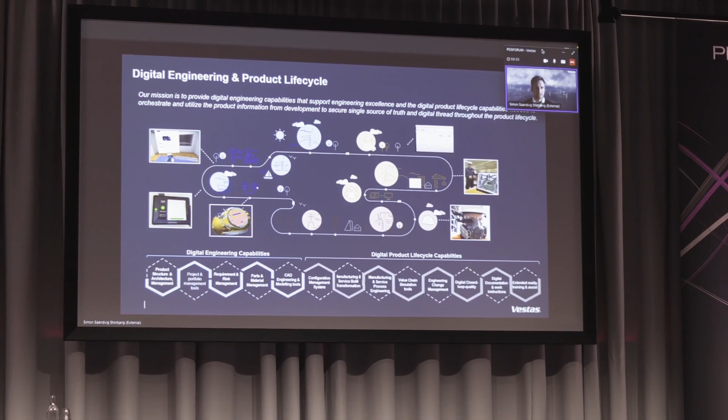So a few words about me. The topic that we're here to do today is very central to what we're working with in the area that I'm heading. We're working with what we call digital engineering, basically providing the capabilities to support engineering excellence, and the capabilities to utilize all of the data and great information that we generate in engineering downstream at Vestas. We organize into 11 digital product teams that span the way from working with product architectures, through working with bill of materials, configuration, documentation, simulation, and on you go.

So as you can imagine, lots of topics very close to the topic of today. The content, what I thought would be relevant for today, is bringing a few insights into our story. Rather than going through all of the details, I would try to spend some time actually giving you an introduction to Vestas as a general, what is the company, and also some of the context for what have motivated our digital thread journey over the past 10 years. And then in the ending, I would share some few examples of our story. I know there's much to cover, so I think we'll have a good time.

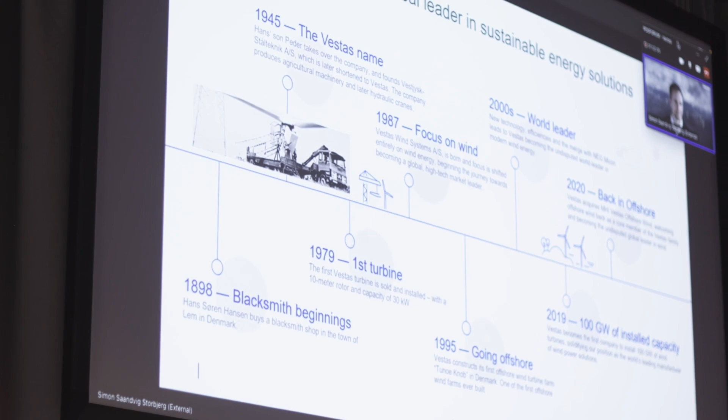But that's the numbers. If we look to the history of Vestas, we are a company with roots in Denmark back in the 1890s. The world was about to see the first turbines, and in a small blacksmith shop in the west part of Denmark, a guy got a great idea to start building turbines, and the first turbine saw the world in 1979. And the product has obviously developed a lot since then. You see a picture of one of the first turbines on the screen.

And 40 years later, 4 years ago, Vestas marked the 100 gigawatt milestone of installed capacity. So as you can imagine, quite a dramatic and impressive evolution over those years. And today, Vestas is the leading manufacturer of wind power solutions. If we look at what kind of wind turbine products we offer today, it's evolved into broad solution programs, focusing on both onshore and offshore. And Vestas is supporting wind turbines across the globe, which also require different kinds of products to capture the wind most effectively.

I'm not sure if you've had an opportunity to get close to a turbine, but at a distance, it might be hard to get an impression of the size. So I included this slide to give you some idea about what kind of amazing products we are dealing with. This turbine on the screen here is the latest variant that we have developed. It's a 15 megawatt machine. It generates power equivalent to 20,000 households.

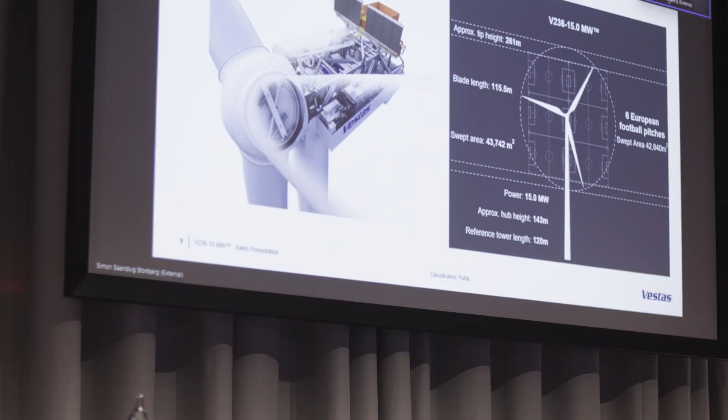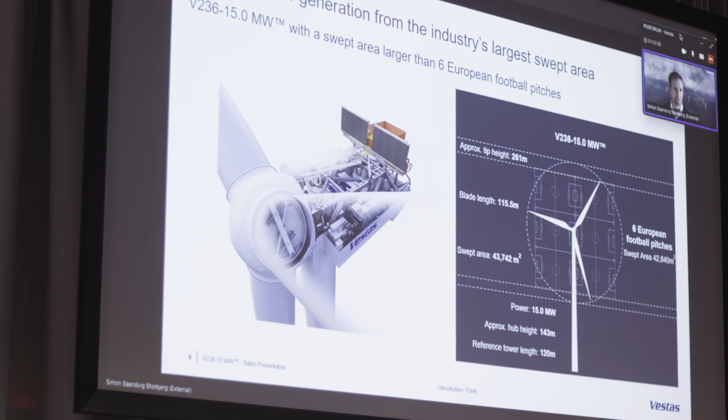And if some of you drove from Denmark to Sweden today over the Øresund bridge and looked up at the big pillars, you can imagine the height of this turbine, actually reaching 60 meters higher than the bridge. So the tip height here is 261 meters. For the latest 15 megawatt turbine, you would typically see a hub height, that's the center where the blades are installed, of 143 meters. So imagine up at that height, you have a house of 200 square meters, with a machine room of 600 tons. So I think it's quite a magnificent piece of engineering that we're working with. Of course, also requiring a lot of digital support.

So in the renewable energy sector, we have some quite unique challenges, and that has also driven our digital thread journey. So that you understand what has motivated our journey, I will give a few insights into our challenges and what motivated our digital thread journey. And it is clear that the world is facing quite immense challenges to reduce emissions. There's common agreement that if we don't act, climate change and temperature will just increase and bring devastating impacts to the world.

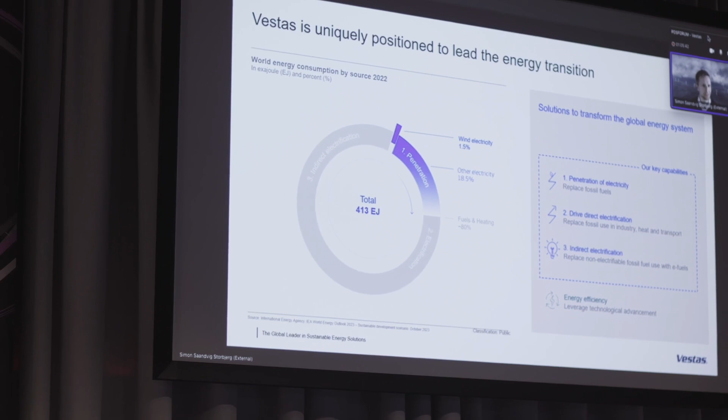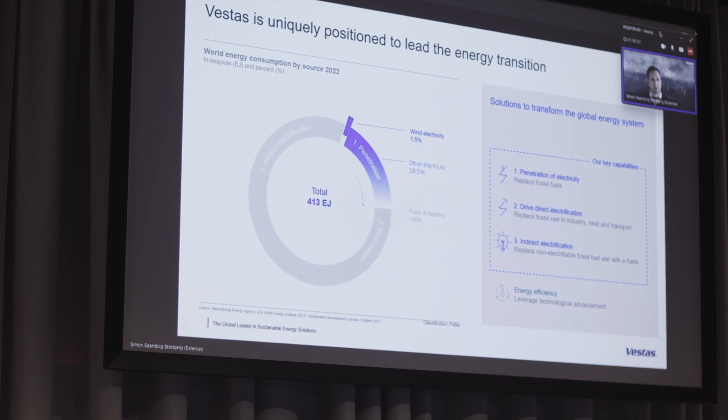So we need to decarbonize the world, and Vestas is uniquely positioned to lead that. We are offering some key capabilities to transform the energy system. And if you look at the donut on the left side of the screen, what you can see today is that wind actually only covers 1.5% of the total energy demand. So you can imagine there's quite a lot of work ahead of us to fill the full donut. And this energy transformation is driven both by securing green power, electricity, but also, as you can see, by replacing fossil fuels in industry, heating and transport with electrical.

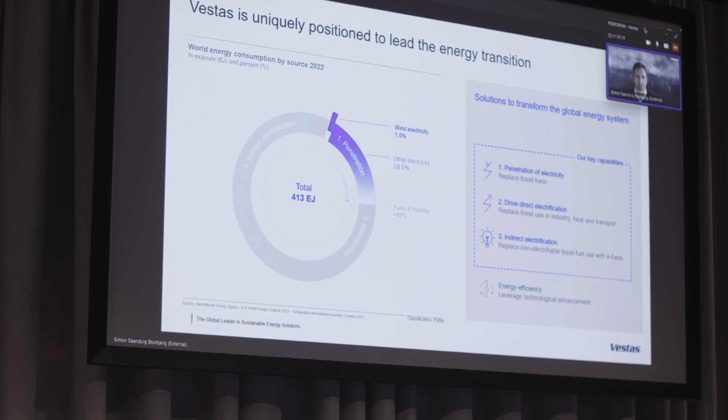And of course, also lastly, replacing these non-electrical fossil fuels with green fuels or e-fuels, as we call it. So that's the solution space we offer in, and that's where we are happy to be.

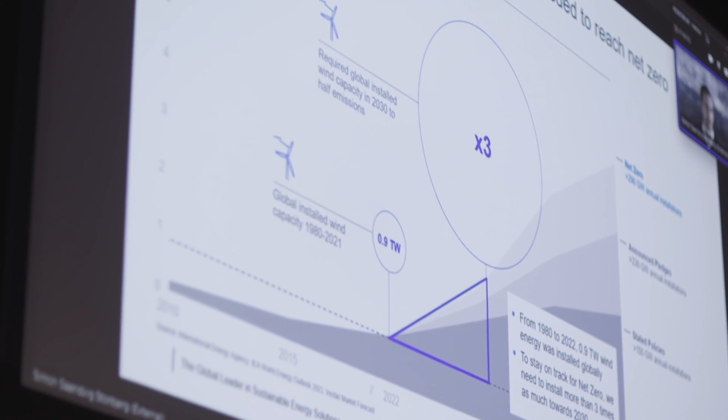If you look at it from a development over the years to come, the energy transition is set for a quite unprecedented ramp up. We are on a quite significant journey to reach net zero, basically avoiding that our temperature increases continuously drastically. We need to install a significant portion of wind capacity over the next years. Depending on what kind of forecast you apply, it looks to be that the turbine installed capacity needs to be tripled over the next period to 2030.

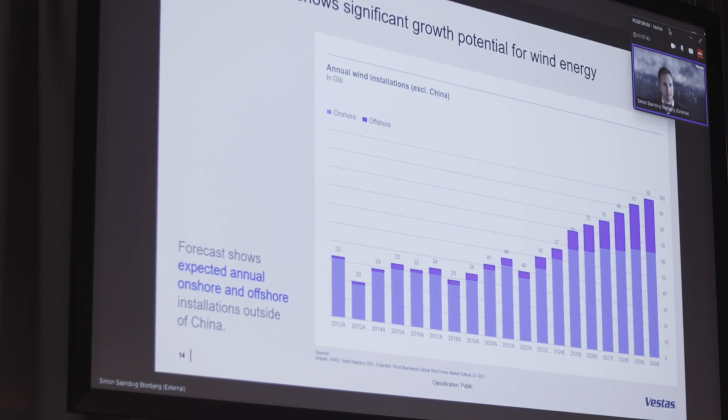And of course, often the reality doesn't turn out exactly as the politician has pledged, but regardless, the ramp up that we're looking into will be significant. And that's also evident if you look to the forecast numbers on the slide here. On this slide, you could see in the light blue the onshore forecast developing over the years to 2030, and in the darker blue the offshore forecast, which you can see start to pick up over the coming years. And all of this sets requirements for our ability to scale, which is one of the key drivers for why we would need to build digital solutions.

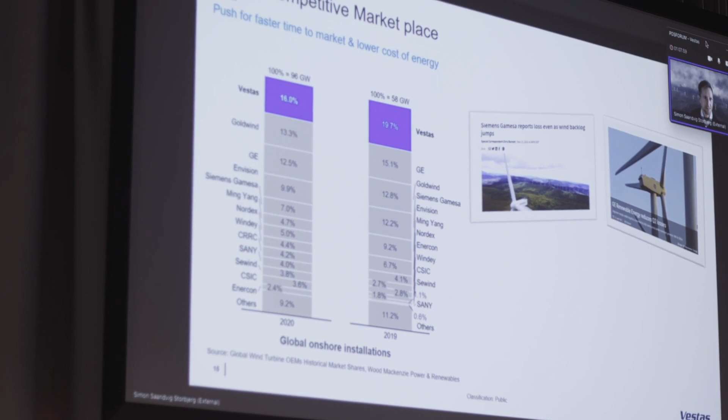Another context-setting factor is that the wind market is highly competitive. We're not the only player. There are quite a few industrial players in this scene. And as you might have heard over the last years, the margins have not been fantastic. Actually, quite a few of the major OEMs have negative results as a consequence of multiple factors, but overall, also giving a very clear signal that it is a maturing industry. We need solutions to cope with the complexity that we are dealing with, and also, of course, to enable that the business that we are in is also financially sustainable over time.

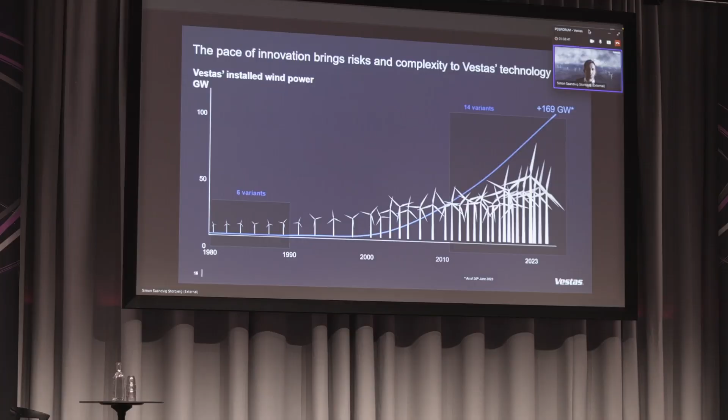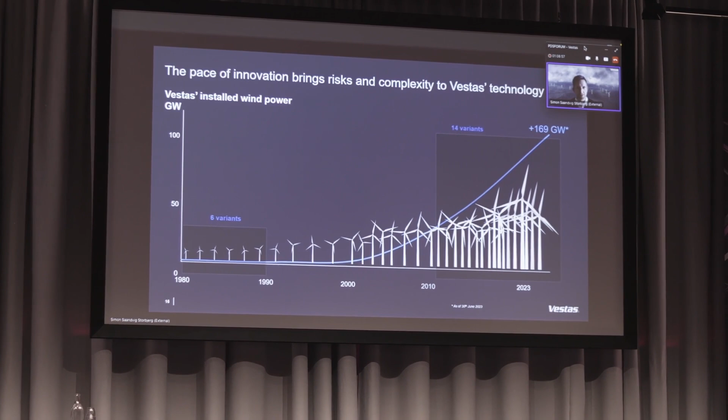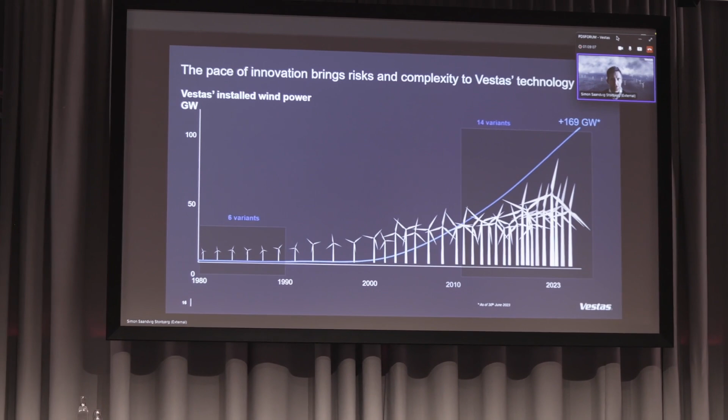And at the same time, what you see on the slide here is also a pretty stellar slide. You could see the number of variants that have been introduced from Vestas over the years, and this is as a result of the push for speed. You could see in the last 10 years, quite a few additional variants have been introduced, enabling that we can lower the cost of energy, but also to make sure that we can capture the wind in all of the markets that we are required to, or have a need to be in. And all of this has translated into progressively larger investment risk for Vestas, and of course also lots of complexity to our suppliers and customers.

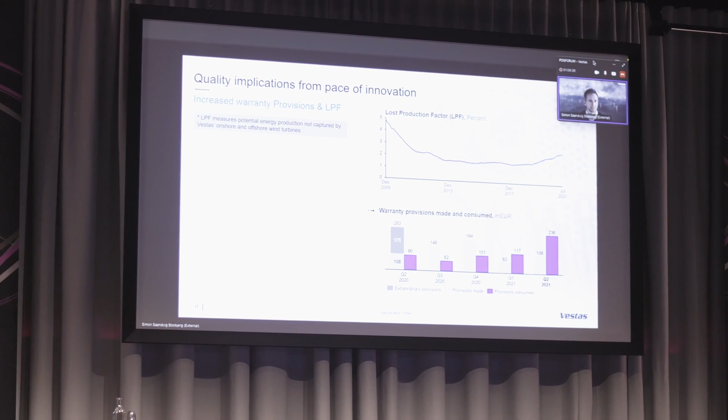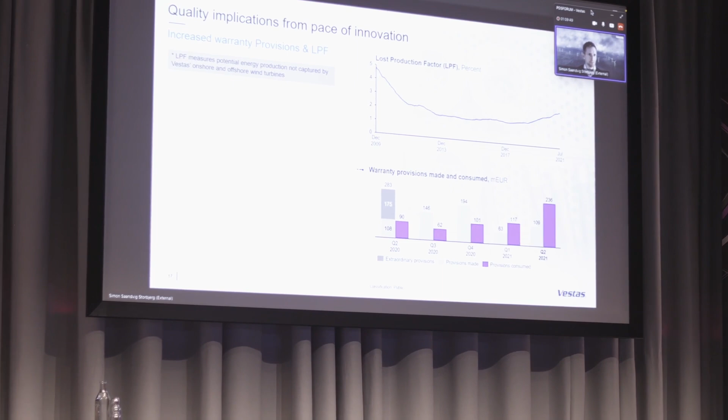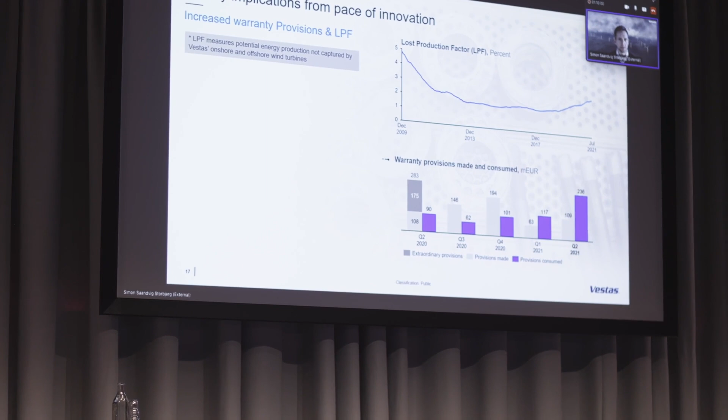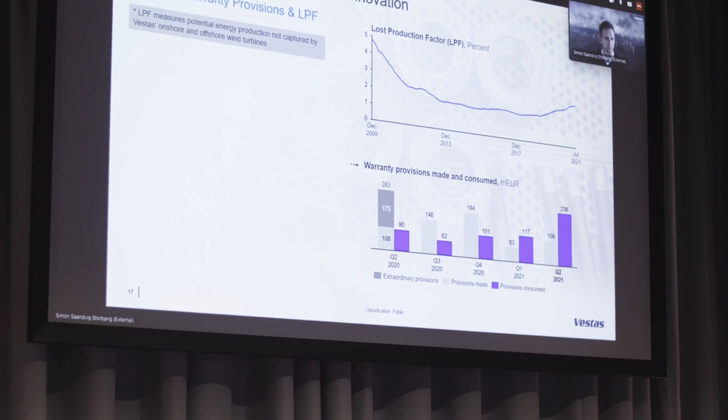And a result of this is evident if you look to the quality and our ability to keep our lost production factor, which is a key metric for Vestas. What you see in the rightmost corner is a graph which signals our lost production factor development over the last years. As you could see, we had a very good rate from the beginning of the 2010s. Over the last years, unfortunately, it's picked up the wrong direction, and as a consequence, our warranty provisions for quality have increased significantly, and the same goes for the other OEMs in the industry. So this is one of the key drivers for digital, that we are able to support engineering, support introduction with new ways of working, so we can actually reduce this situation and introduce products that yield a very high uptime.

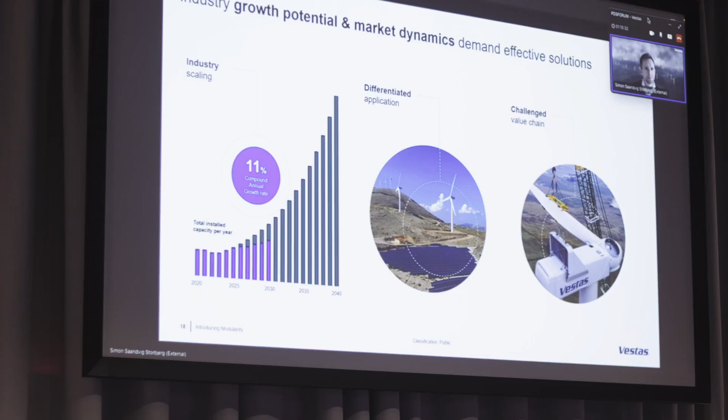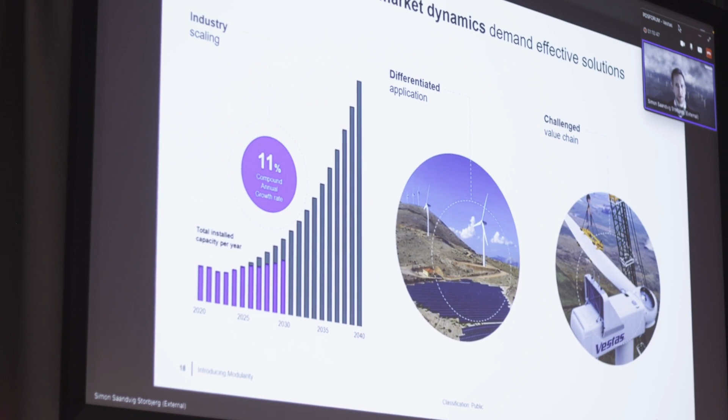So summing it up, the industry challenge that we are in is basically a mix of being able to scale efficiently, meeting the global demand. Staying a global player requires that we are able to provide differentiated applications. So the use cases and use factors for wind vary across the globe. It's due to wind conditions varying, grid requirements varying. Lots of requirements are very unique to the different markets. In other words, Vestas is basically there to customize our solutions most effectively to those needs. And that brings in a challenged value chain. So we need to operate that value chain and support that we can have operational excellence through the chain.

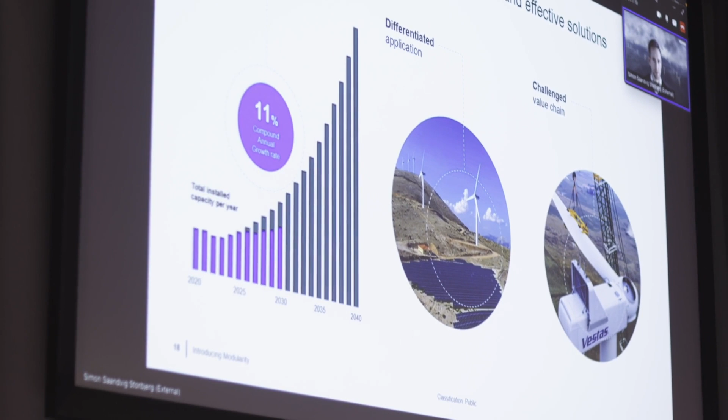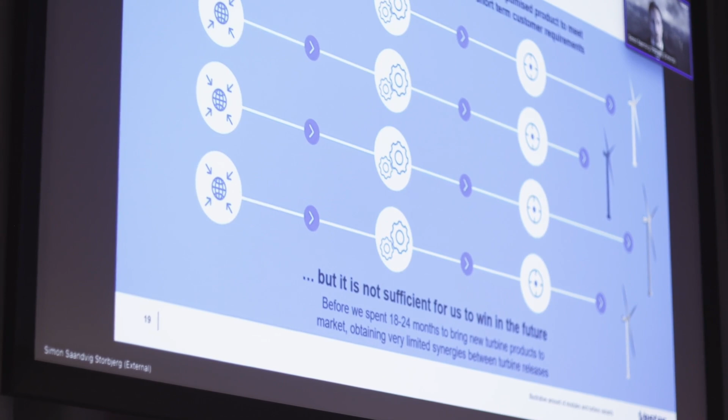And for that reason, Vestas has, over the last years, introduced a modular product strategy. We are undergoing that transformation of our product development approach. So in the former approach, you would find that our development was very driven by a set of customer needs, more one project or one use case. And as a consequence, the products were highly optimized to meet, let's say, local requirements.

And as a consequence, it took quite a lot of time to introduce new variants. You could see here about 18 to 24 months to launch every new product. But more importantly, also a lot of costs and a lot of new parts, new solutions that caused, of course, a kind of a domino effect of introducing a lot of changes to the products. You can imagine one change in one part of the product could easily cause ripple effects to other parts and introduce a quite significant degree of engineering changes across the product.

So this has added up the cost, and for that reason, Vestas has, over the last years, applied this modular approach. So looking more at the global need, global use cases and use factors for wind, and as part of that, developing our architecture and our modules to respond to that most effectively, where the volume across the use cases is. And that allows us to now more effectively customize our solutions to the customer use case through configuration rather than engineering to the order. And this context is important to understand also because it sets requirements for how our digital backbone needs to evolve.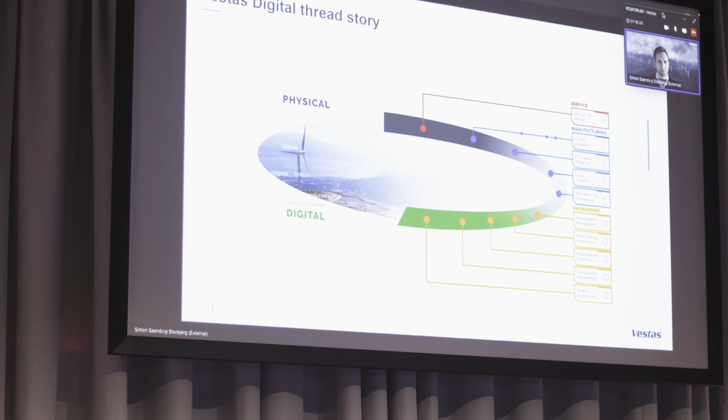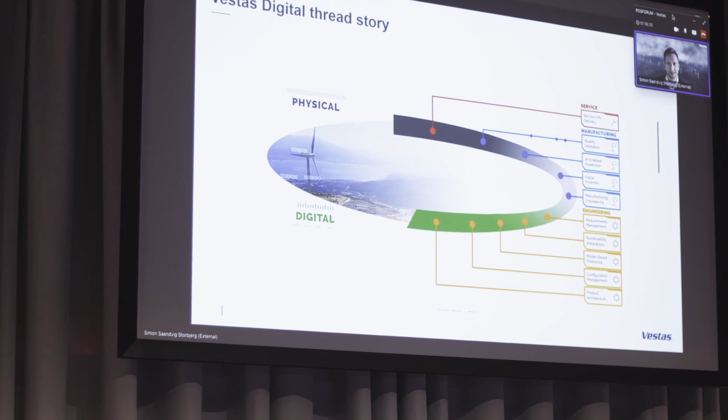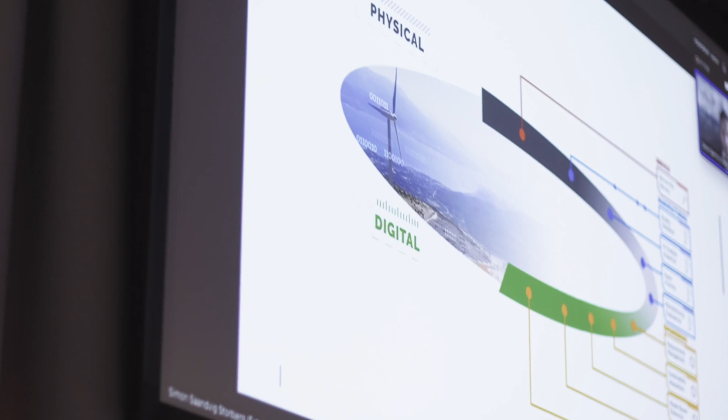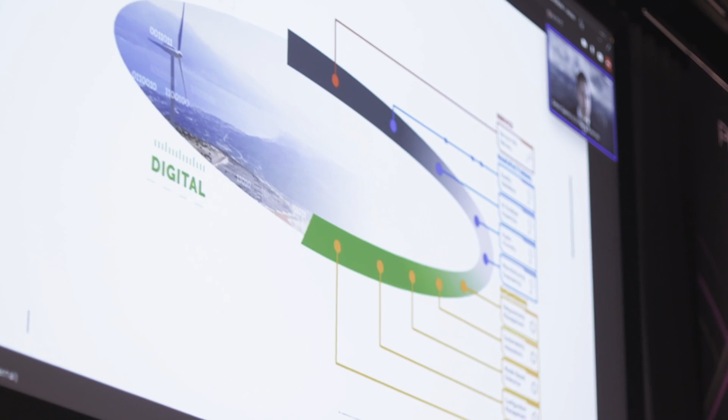The Vestas digital thread story has evolved together with PTC, and I'm very happy to share this great picture that PTC has co-developed with us, showing how the story comprises multiple elements. We started our journey in engineering, working with CAD and PDM, and I could hear that was also a good topic for the sessions today. We have later evolved into working also with requirement management, model-based design, product architectures, how we define our parts, our bill of materials, and of course spanning into how we work with manufacturing and service. And rather than trying to cover all of these elements in these few minutes, I will try to give you some insights into how we've implemented digital thread in our blades design and manufacturing, and through this cover some of the components in our digital thread.

So what motivated the blades digital thread, which you see here on the screen, is basically the elements that we've been through in the past sections, right? Modularization, it's been quality, it's been cost and time to market.

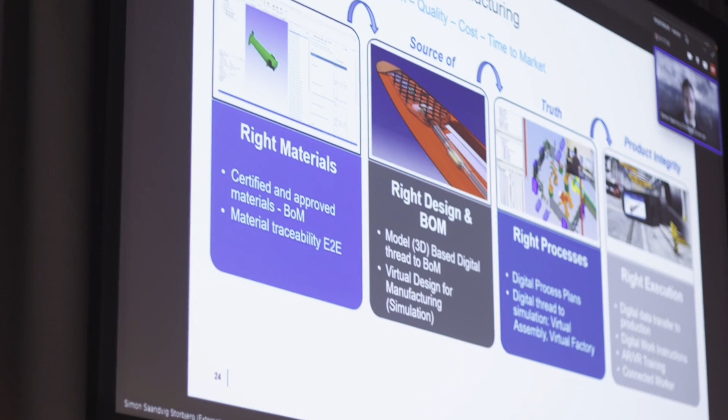And our digital thread journey with blades has been motivated by basically four key components: securing that we get the right materials into the blade, securing that we know the master data and our data that is used to describe the materials going into the blade are digitally connected with a thread into the bill of material.

And then supporting our blade design process so that we have improved modeling capabilities to enable what we call the model-based digital thread from our CAD models into the BOM. And of course, supporting also that we can utilize these models to do virtual design, do simulation of our design.

Furthermore, the third component we work with is ensuring that the digital thread from the model is extended into the process definition, so allowing that our process descriptions, our process plans are digitally described with a digital thread to our operation, also enabling that we can simulate our processes virtually, doing virtual assembly, virtual factory simulations.

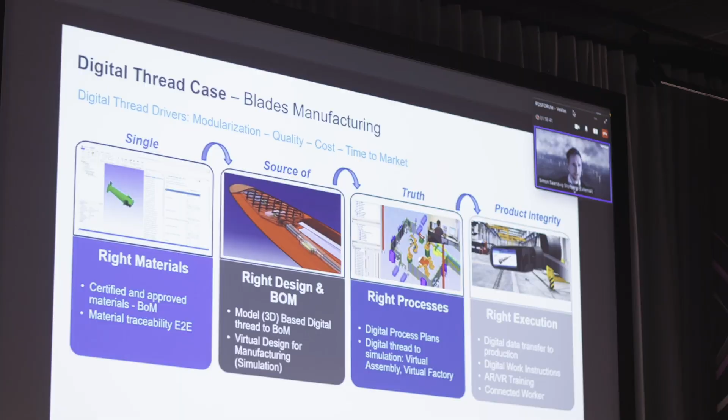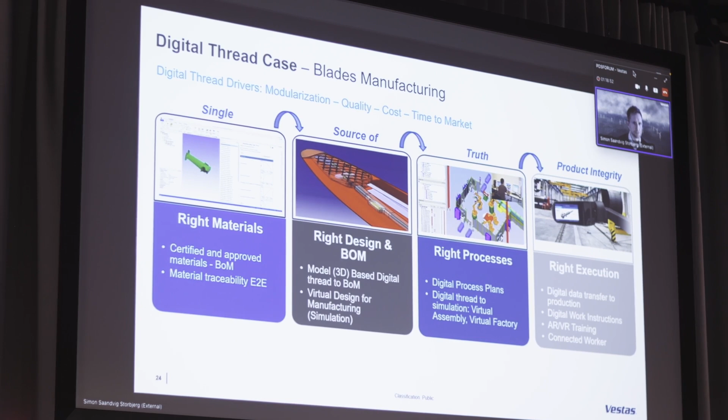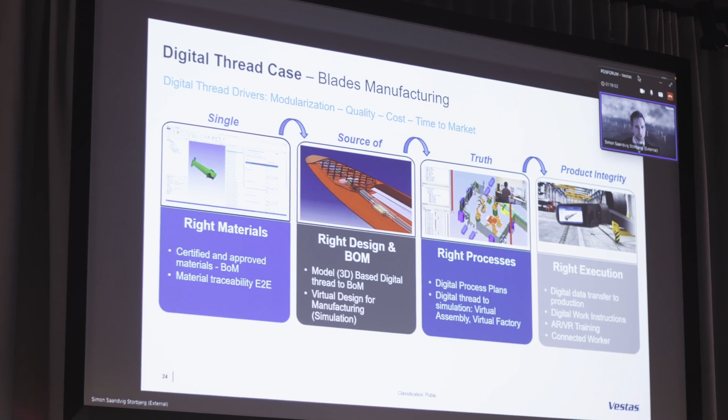And finally, working with our thread of the data into execution, so supporting that we can do sharing of data to our production equipment, sharing data to our digital work instructions and training applications. These four components you would now see unfold in this very detailed slide. But now let me apply some blocks to it so you can imagine the different components of our full blade digital thread.

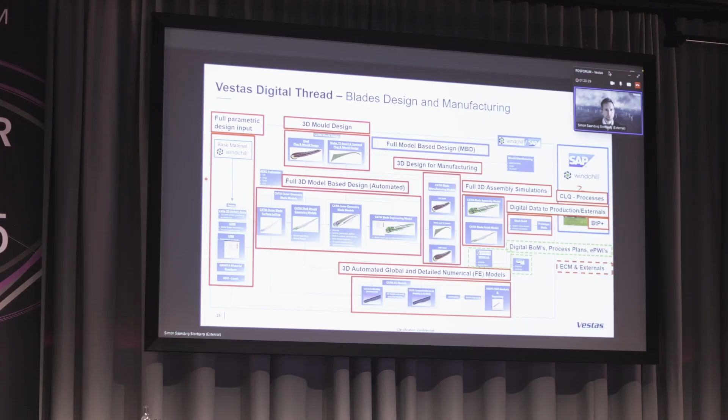And this parametric foundation is then connected to our 3D modeling tools, which is used to describe both the blade and the blade mold design, which go together. And this blade design process is then integrated into our PDM environment, which is Windchill. So basically imagine a digital thread from our different models, our engineering model, into the PDM environment to our EBOM.

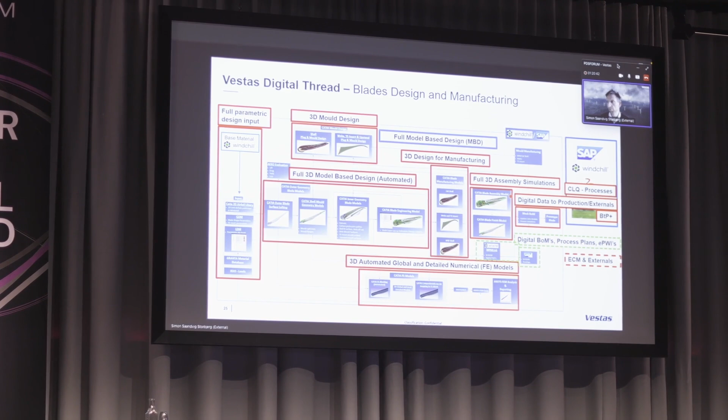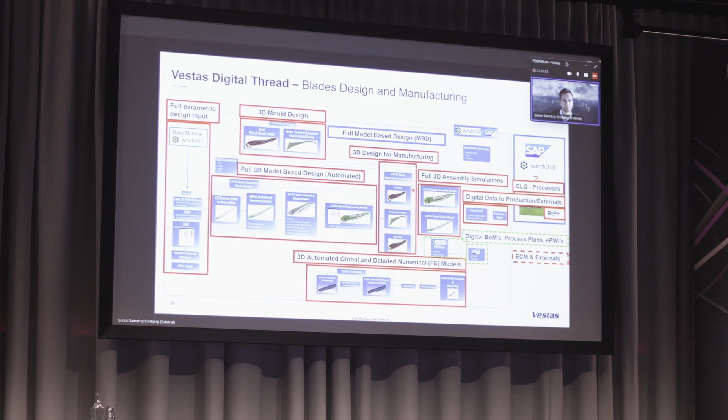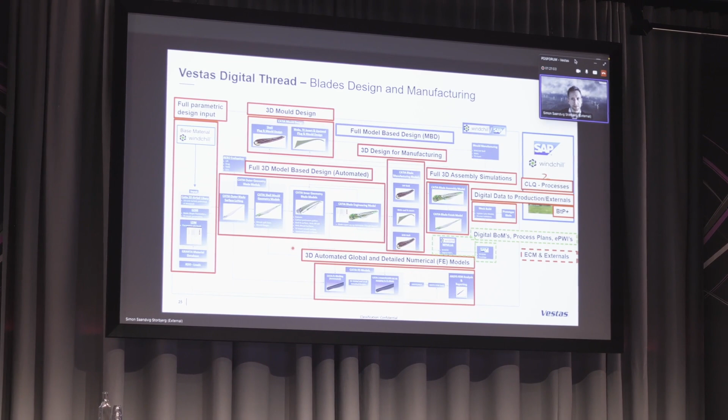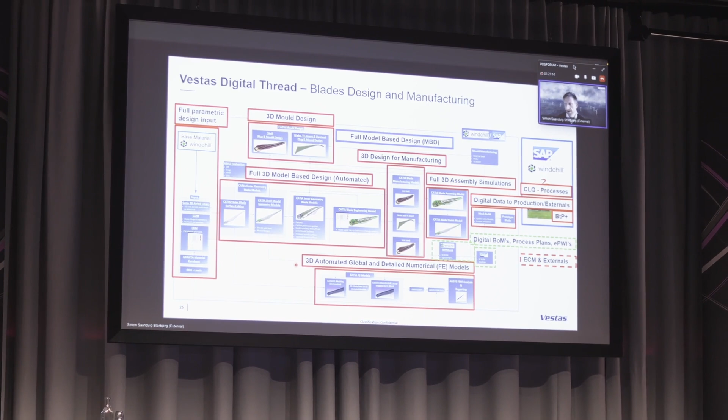Moreover, also our manufacturing models, so how the different shapes go together, the parts that describe the process of building the blade, go into the manufacturing BOMs and manufacturing process plans. The models are furthermore connected to our simulation models, our finite element models, helping to do automated data sharing between these. And of course, these are built in ANSYS.

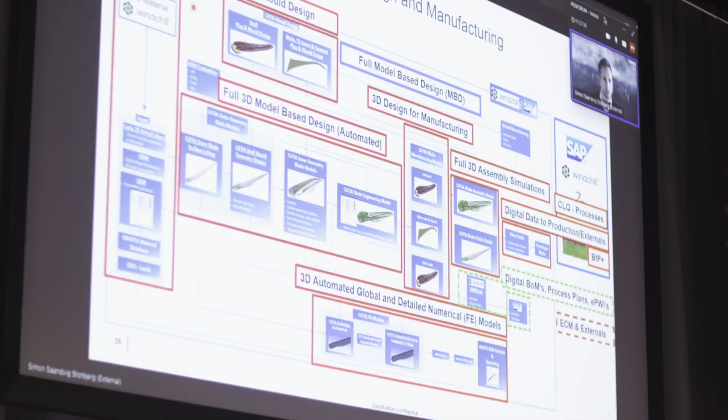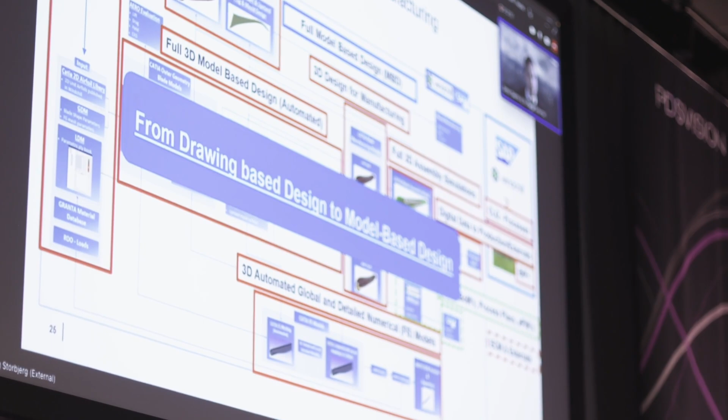The data that we do in our BOMs, our manufacturing BOMs and process plans, are in the end built with an interface to our ERP environment, which is SAP. And in this way, connecting a full digital thread from the very early days of defining the models through the modeling process to our operation. What I want to say here is that this has basically transformed our development process from a drawing-based process to a model-based design process, which has yielded quite significant results. I'll get to that in a few minutes.

If you zoom in on a few of the elements in this digital thread, what we've worked with is basically the digital thread from our CATIA models into our extended engineering structure, our engineering BOMs, which has been further developed and matured to our manufacturing BOMs, which are connected to our ERP environment in SAP. And finally, of course, down to our manufacturing execution environment, which is Apriso.

The process plan that we have generated based on the blade design you saw before is used to generate our production work instructions. We call them ePWIs, electronic production work instructions. And this generates basically a full digital thread from the model to the execution.

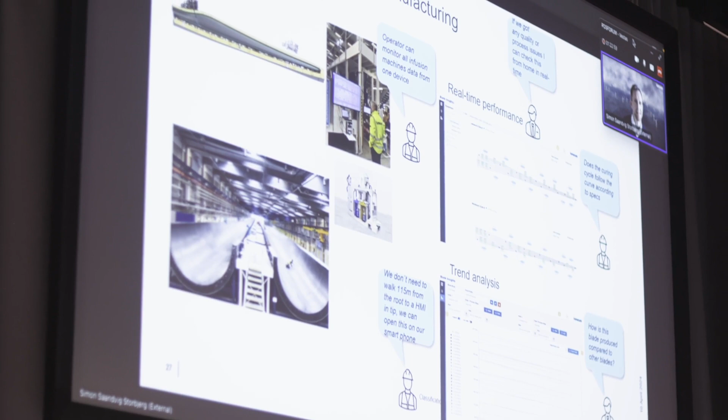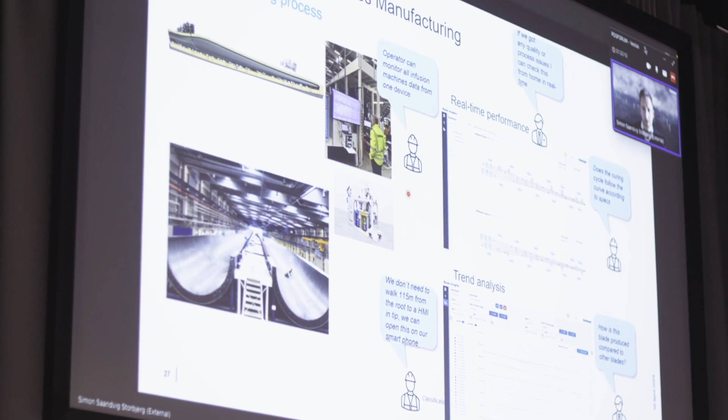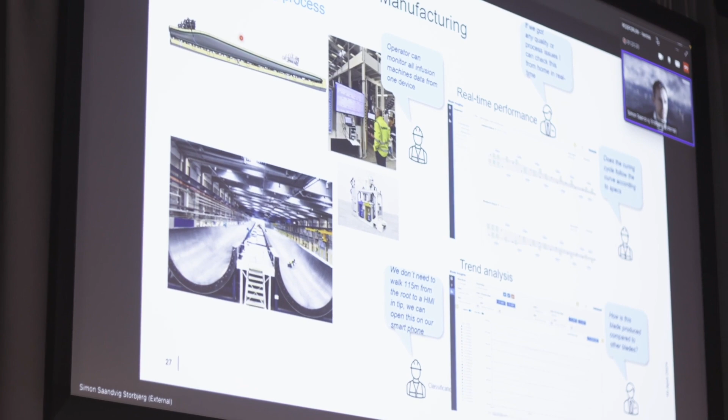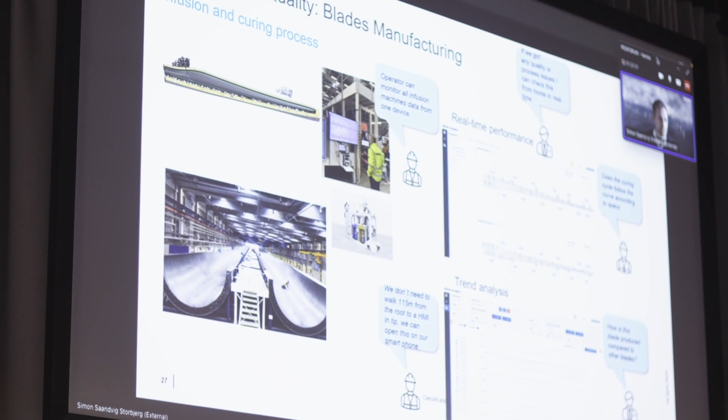Finally, the blade digital thread is also supported by closed loop. We are embarking on this journey now, and what you see in the picture here in the upper part is the pilot running now in 2 of our factories, connecting digitally to the sensors in the mold, through that capturing real-time process parameters and data from the process, enabling the shop floor workers to correct the process in real time, but also, of course, sending and sharing data back to the designers, who can apply trend analysis and understand what happened in the process and how different blades compare over time.

All of this is done utilizing Kepware, connecting to the sensors, and ThingWorx, connecting these different data sources and building it into our data insights solutions.

So, sharing a few learnings on this journey in the end here. It's been pretty amazing to see the results of this digital thread for blades. One of the numbers to share here is our cost of poor quality, which you saw was one of the key figures, and that has been reduced for the first blade in serial production by 90% compared to previous blade types.

We've reduced our time to market significantly, simply by reducing from previously doing 4 to 8 mock-ups. Now we only need to do 1. And you can imagine the related capex savings from not needing to manufacture these many prototypes. So all in all, some really impressive results from the blade manufacturing alone.